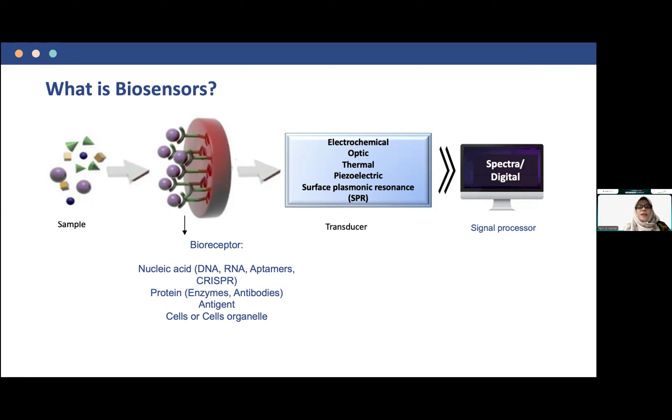Secara umum, prinsip kerja biosensor dapat dibagi menjadi tiga tahapan. Pertama, pengenalan atau recognition. Di sini bioreseptor akan berinteraksi secara spesifik dengan target analit. Misalnya antibodi akan mengenali antigen, seperti DNA akan mengenali pasangannya atau molekul tertentu. Interaksi ini sangat spesifik sehingga menjadi dasar utama dari akurasi biosensor.

Tahap kedua adalah transduksi sinyal. Interaksi biologis tadi tidak bisa kita lihat atau kita ukur secara langsung, sehingga perlu dikonversi menjadi sinyal fisik atau kimia yang terukur yang bisa dibaca. Inilah peran transducer. Dan tahap ketiga adalah pemrosesan atau pembacaan sinyal.

Sinyal yang dihasilkan kemudian diproses dan ditampilkan dalam bentuk yang mudah dipahami, misalnya angka atau spektrum atau gerakan jarum. Kalau dilihat dari sisi yang lebih mendalam, terutama untuk biosensor elektrokimia, proses ini lebih melibatkan fenomena di permukaan elektrode. Nanti mungkin akan dibahas.

Biosensor ini diklasifikasikan menjadi beberapa, di antaranya berdasarkan bioreseptor. Bioreseptor itu merupakan otaknya dari biosensor karena bagian inilah yang menentukan selektivitas, apakah sensor mampu mengenali target secara spesifik atau tidak.

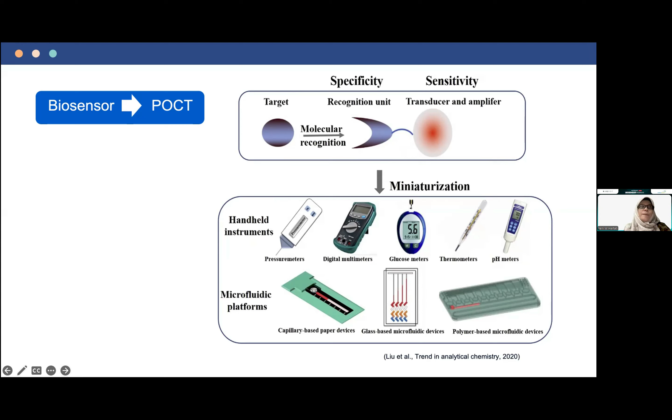Jadi miniaturisasi ini merupakan cara untuk menyampaikan teknologi dari lab ke lapangan tadi. Nah, bagaimana biosensor berkembang menjadi POCT ini? Pertanyaan berikutnya adalah seperti apa perangkat POCT yang ideal? Untuk menjawab ini, WHO memperkenalkan konsep yang sangat terkenal yaitu kriteria ASSURED.

Jadi A-nya affordable, artinya perangkat harus terjangkau sehingga dapat digunakan secara luas, termasuk di negara berkembang. Kemudian S-nya sensitif, harus mampu mendeteksi target dalam konsentrasi yang rendah. Kemudian S yang kedua spesifik, harus selektif, hanya merespon target yang diinginkan. Namanya sensor ya harus menuju target itu, dalam matriks yang kompleks.

U-nya user friendly, mudah digunakan bahkan oleh non ahli atau non tenaga medis. Kemudian R-nya rapid and robust. Hasilnya harus cepat dan sistem harus stabil dalam berbagai kondisi lingkungan. Kemudian equipment free, sebisa mungkin tidak bergantung pada alat tambahan yang kompleks. Jadi dibuat mini dan portable.

Kemudian D-nya deliverable to end users, artinya mudah didistribusikan dan benar-benar sampai ke pengguna yang membutuhkan. Jadi di daerah terpencil, di puskesmas, bisa terjangkau, bisa digunakan, tidak harus ke kota misalnya untuk mengecek atau dalam hal ini misalnya untuk diagnosis awal, diagnosis dini. Jadi diagnosis yang diharapkan itu tidak hanya akurat tetapi juga accessible. Dan menariknya biosensor itu, terutama yang terintegrasi POCT ini, dirancang untuk memenuhi hampir semua kriteria ASSURED ini.

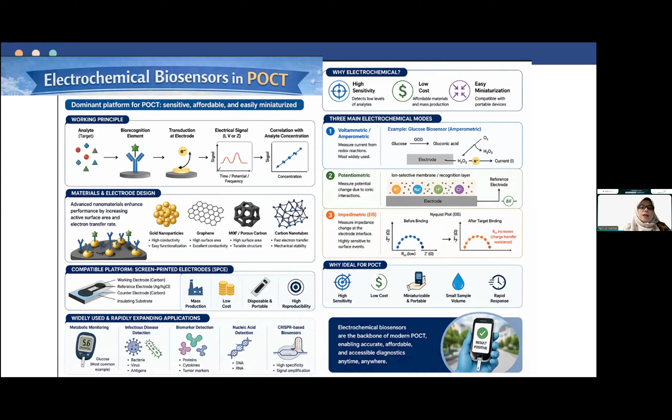Nah, di sisi materialnya, untuk pengembangan elektrokimia biosensor ini sangat mempengaruhi bagaimana kinerja biosensor itu. Jadi permukaan elektrode biasanya dimodifikasi dengan nanomaterial yang umum, misalnya emas nanopartikel, grafen atau turunan karbon, atau MOF, atau MIP. Permukaannya menjadi lebih aktif dan mempercepat transfer elektron. Metode modifikasinya bermacam-macam, ada teknik elektrodeposisi, ada teknik dropcast, ada teknik spinning, dan lain-lain.

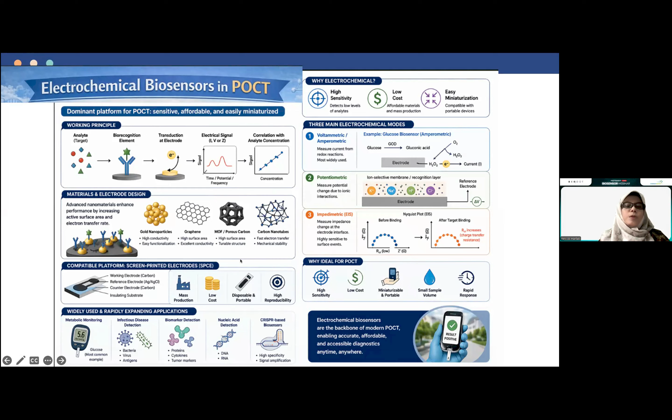Kemudian platform ini sangat kompatibel dengan teknologi SPE, screen print electrode, yang memungkinkan produksi massal dengan biaya yang rendah. Jadi inilah yang membuat biosensor elektrokimia sangat cocok untuk POCT karena dibuat kecil, murah, tetapi tetap sensitif. Jadi banyak contoh yang sudah disebutkan juga seperti glukosensor, kemudian sensor berbasis CRISPR juga sudah banyak dikembangkan.

Nah, sensor elektrokimia ini pada perangkat POCT bisa digunakan untuk menganalisis berbagai biofluid, sampel biologis yang mencerminkan kondisi fisiologis tubuh. Misalnya dari sampel darah, yang merupakan biofluida utama karena kaya informasi, namun pengambilannya bersifat invasif, jadi harus diambil darah. Sehingga mendorong penggunaan alternatif non-invasif seperti cairan interstisial, keringat, saliva, dan air mata juga menjadi salah satu alternatif. Biofluida non-invasif ini memungkinkan pemantauan kesehatan secara lebih nyaman dan real time, meskipun beberapa seperti air mata masih menghadapi tantangan teknologi, agak susah mengambil sampelnya.

Jadi secara umum teknologi ini fleksibel dan dapat disesuaikan untuk berbagai aplikasi diagnostik dengan memanfaatkan beragam jenis bioreseptor seperti enzim, antibodi, dan aptamer. Jadi contoh yang paling sukses yang banyak disebutkan dari POCT ini adalah sensor glukosa atau glukosa biosensor. Ini telah merevolusi manajemen diabetes di seluruh dunia.

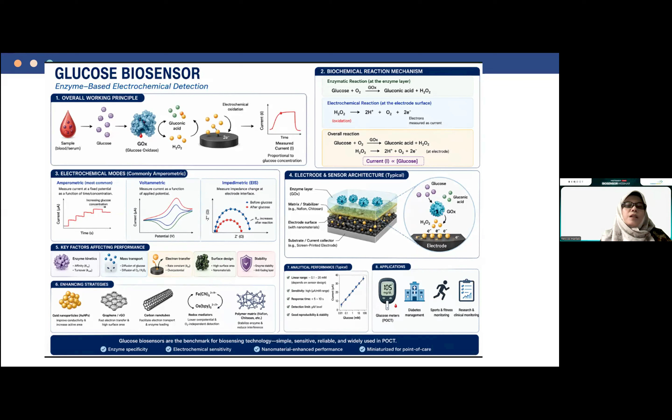Jadi itu contoh yang paling banyak dari electrochemical biosensor untuk POCT ya.

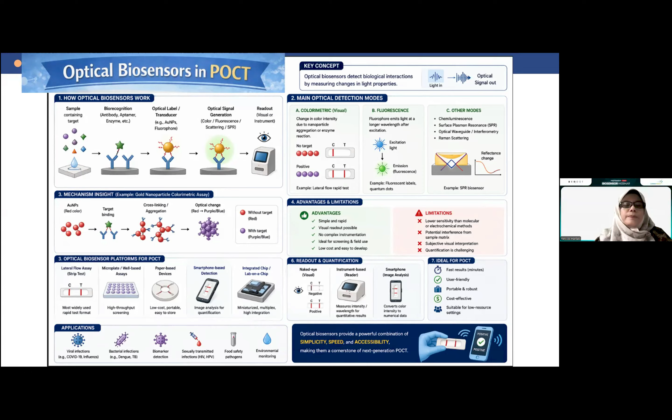Kalau berbasis antigen, pendekatan pertama ini tadi yang banyak digunakan di rapid test, mekanismenya sederhana. Terbentuk kompleks antigen antibody, kompleks ini menghasilkan warna.

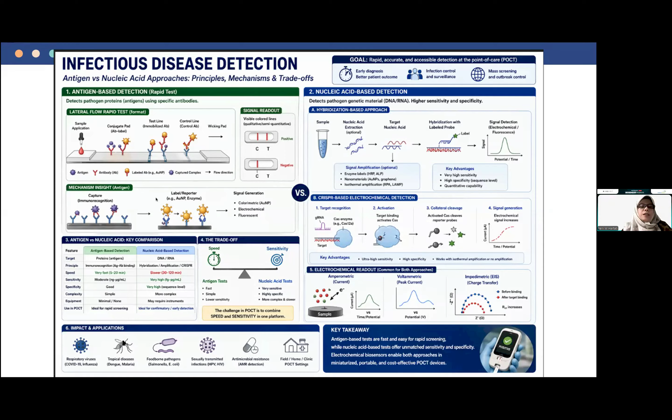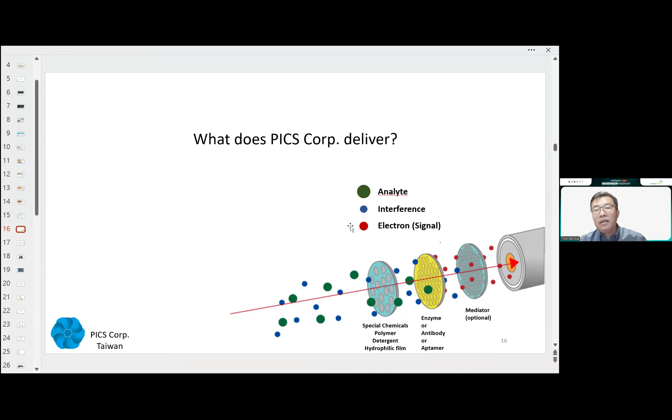We start from the electrons, because if the electrode is not stable enough, it's very hard to get a low background and make the signal-to-noise ratio better. Most of the time, our customers emphasize what the problem is, and they have an idea to solve it, and they can define why it's important, and we help them test it and make a prototype for them.

Most of our customers are so smart, they have a lot of ideas to solve this problem. We play a role to help them make everything simple and not too complex. Most of the time you can think about optical, electrochemical, thermal, and magnet as the signal to get numbers and measure it.

Most importantly, for academic research, you confirm what is the detection limit or how to prove the concept. But unfortunately, you need to think about repeatability and reproducibility. Most of the time we are stuck on reproducibility because the material has a lot of variation, or even the production process is too complex, too much. That's why the stability is not good enough, especially if you modify too many layers on the electrodes. The yield rate will get lower and lower because the performance will not be good.

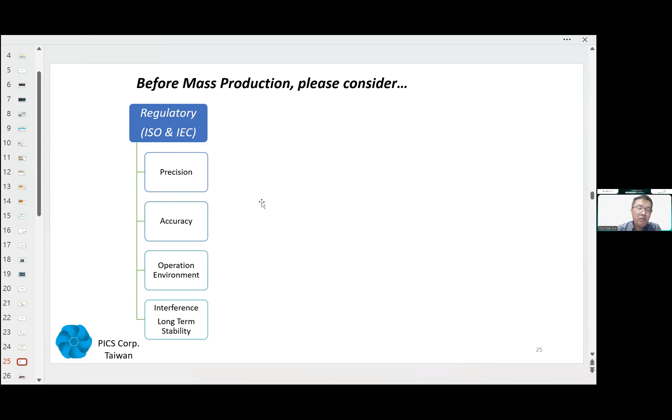This page is very, very important. Before mass production, please consider regulatory requirements like ISO or IEC, precision, accuracy, operation environment, interference, and long-term stability. For example, long-term stability - we think about open vial long-term stability and storage long-term stability. It's about quality. For example, a diabetes patient's glucose meter needs to follow ISO 13485 and ISO 15197. That's a very crucial request from regulatory.

And most importantly, you need to finalize the market size. Market size means what is the user prevalence and what is the user frequency? You need to calculate that, and determine if it belongs to emergency or chronic need. It's very important also to identify your major competitor - who is the top 5 over the world or territory, who is the winner? You need to identify that when you want to take this topic to make the product in the end.

And the pricing structure is very important. Most of the time, honestly speaking, production fee will be less than 30%, because another cost is spent on sales and marketing, like 30%. R&D or administration occupies around 20%. So finally, even after you minus the tax, you just only leave 20% as your profit in the optimized scenario. That's the real world we operate in.

So when we open this box to tell the researcher - if you just only think about the material price and the end user price, it's not fair. You need to think about the sales and marketing fee or even daily operation fee, not only production. That is the real one, and it's easier to convince the investor reasonably.

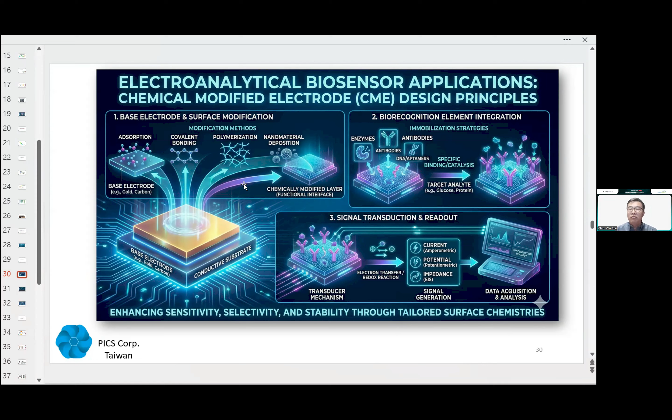So it's much easier to understand, and much easier to carry on. Because normally, if you think about an analog signal, everyone judges it from a different concept. Even with lateral flow tests, one line or two lines, and how deep the color is to determine the concentration - no one can judge that precisely. But electrochemistry or electroanalysis can do that because it's a digital signal.

So who is the biggest marketing or very successful example? Glucose meter. Actually, there are two kinds of glucose meters - one is a portable traditional glucose meter with a strip, and the second is the continuously monitoring glucose system, we call it CGM. Or you can change the enzyme for lactate, or even lipids like cholesterol, triglyceride, and high density or low density lipoprotein. This is a very successful story you all know, and the market size is pretty high - right now 1 in 10 people has diabetes in the world.

So second, what application can we approach? Small molecules like dopamine, catechol, some small molecular weight species you can detect, or ions like heavy metals - lead, cadmium, potassium, sodium - or other ions causing pollution in the environment, or some biomarkers you can detect. Using redox activity, we call it cyclic voltammetry, to see what is the real performance to set the voltage to detect this species. That's why you can get a very fast real-time result with low sample preparation.

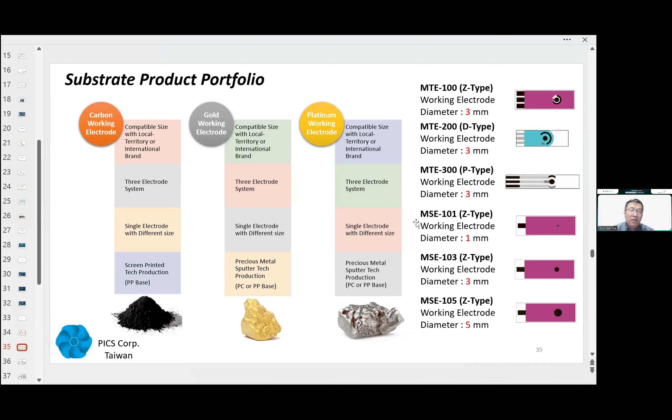Maybe all of you have enough background to see how good the performance is. But I just try to tell you, if you see this graph in the middle, if the peak is more symmetric, it's good. If the peak is too separated, too much, I think the resistance will get so high, so the background will become worse.

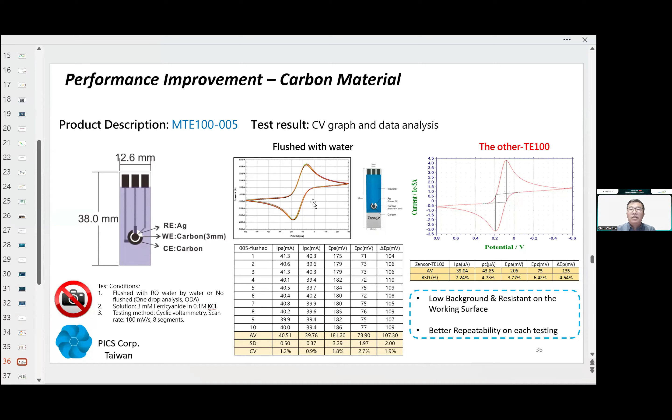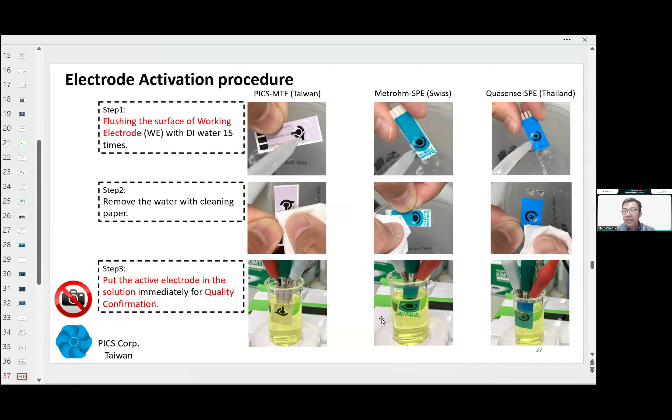So we also have some comparison from ours and from Europe, even Thailand manufacturers. We used the same process to make the comparison and testing by ferricyanide in potassium chloride solution. Actually, right now we can have the better one. More symmetry is easier to get a low background and the RSD will be lower.

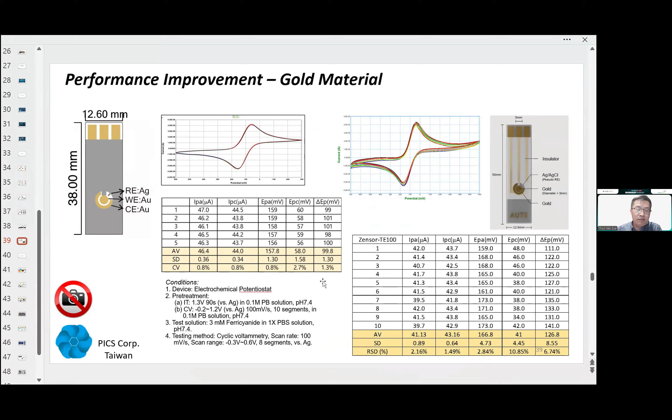So that's why the substrate is very important to all of you if you want to go into the biosensor field. And we also have the gold, same philosophy. Later on, I think I can share the slide because today we have so much information to share with all of you.

We also provide equipment for lab and industry scale. It means reliability is priority one out of a hundred. The printing looks so easy, but actually you need to think of so many things, like your ink, your tooling, your moving parts, what is the equipment, and the drying oven is very important—not the batch type.

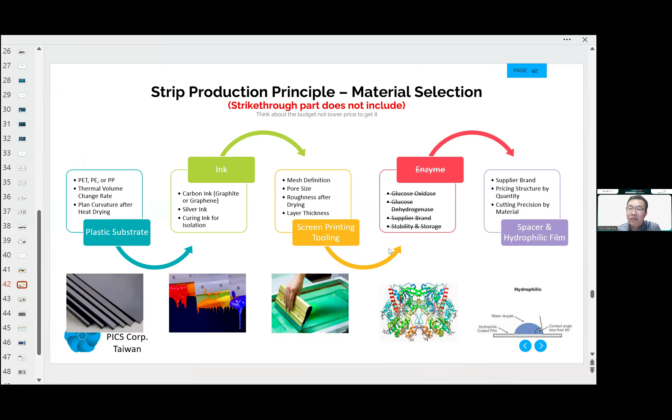And even the material, we need to select what is the plastic substrate, what is the ink, what is the tooling, even the squeegee, even the pore size or roughness after drying. The enzyme, actually right now we did not offer anymore, but if you need, we also open another page to provide this one. And the spacer hydrophilic film also for the modification.

That's our working station design. If you have a chance to visit our factory, you can see all of them—things from the beginning, from the material to the end, like cutting.

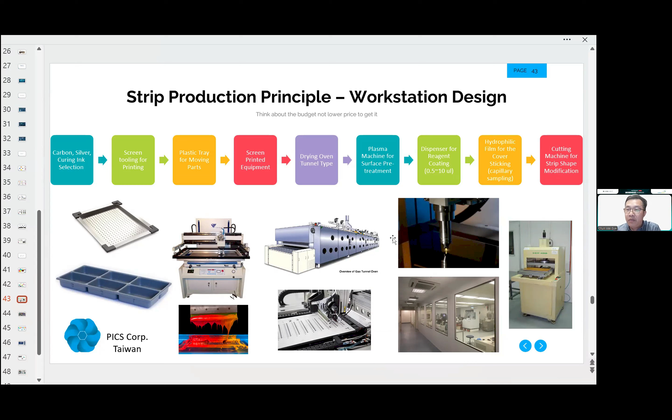So print it, make it dry, use plasma to make a surface pretreatment, use the dispenser to coat the chemical on it, and tapping on the hydrophilic film for capillary sampling, and cutting to make a real one that can be used. So I would like to use this picture to share this.

From left to right side, it means make an ink and print it out, make it dry, pass through the oven, use the plasma to make it hydrophilic, drop something on it, and finally use the cutting machine to make the shape.

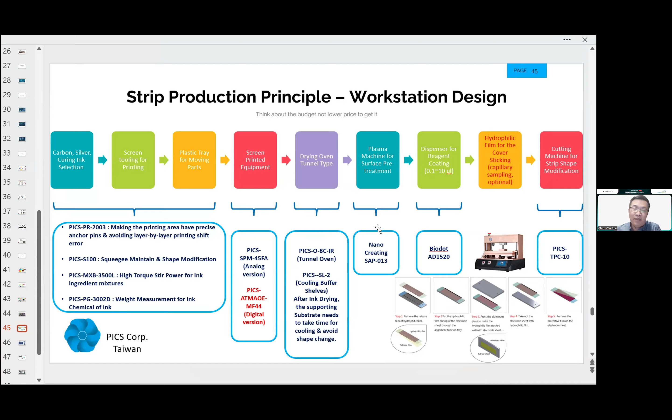That is our equipment we can deliver, and we can help the customer to make the customized biosensor. And the plasma is also very important because it is a key step.

After printing, we have different kinds of plasma to help our customer achieve a certain goal—not only to make a hydrophilic film, but also to make some chemical functional group on the surface. So for different materials, we can share the parameter information with all of you.

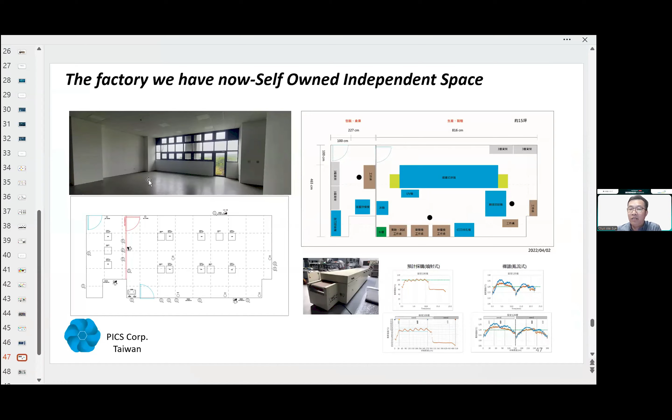Originally, we had a very small space—you can think about that, just only 50 square meters. We then put everything inside, and we also let a lot of visitors come to us to see what's going on. Most of our customers come from Japan and Thailand.

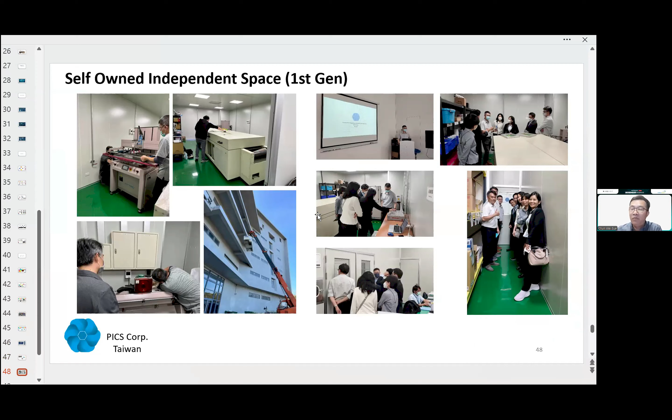And then right now we already upgraded our factory. Now it's the second generation, almost everything automatic.

So I would like to make a summary. I think if you want to have mass production, dynamically, the tolerance window is very important, and the material must be stable. Most importantly, the design must be easier for the manufacturer, because normally we try to solve the problem using all our effort to solve that, but finally, it's very hard to produce it.

And that's why, to show some philosophy or image to the granting agency or investor, think about it—this is good enough and we can move forward to the next step. So that's my summary, and I want to share all this information with you.

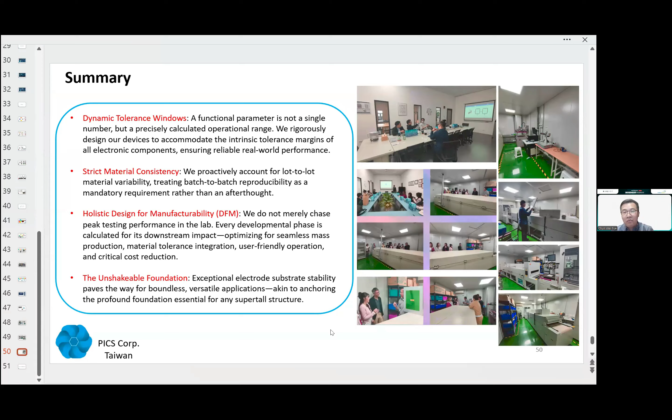Thank you very much, Dr. Warrick. It's a very interesting presentation about how to move from research to mass production. I think for manufacturers there are many things to consider, many things to solve. I hope in Indonesia there will be more manufacturers for biosensor development here. Thank you very much for your time and presentation.

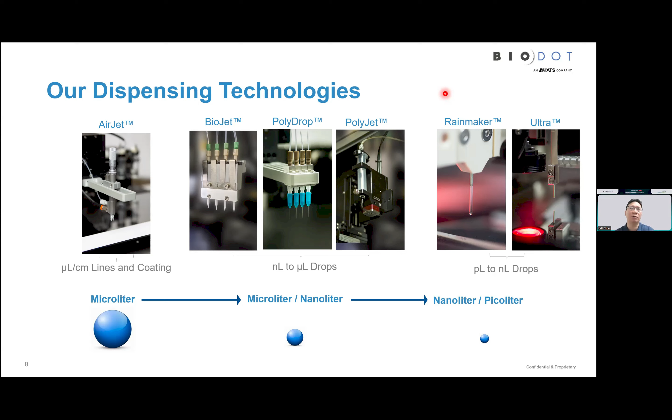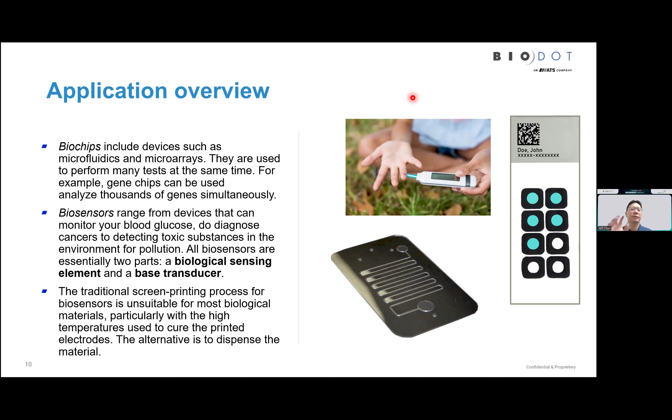Here's kind of an application overview for biosensor and biochip. For biochip: prepare reagent, print biochip, add sample, label, hybridization, then you get a result. For biosensor, similar: prepare reagent, print, dry sensor.

Singlicate, assemble - so what BioDot does here is printing biochip, assembly, and in cytogenetics we can also help with hybridization and wash. But most of the time we focus on these two: print and add sample, because that's how we do precise dispensing on the precise target area.

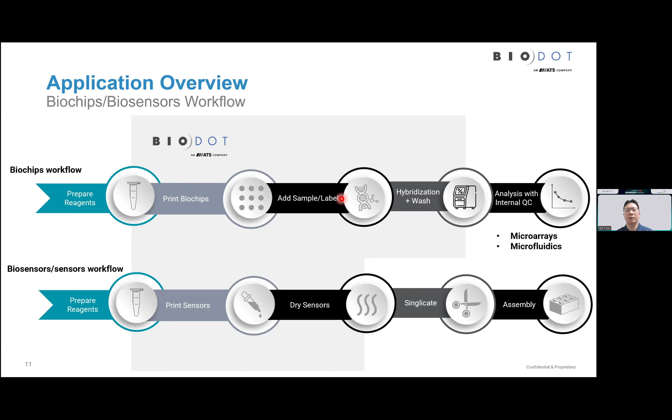So why BioDot? On the market you can see some similar dispensers, but most customers or R&D researchers will face challenges with changing drop volume with low coefficient of variation, called CV. Then you want to adjust chemistry, which often leads to changes in physical properties - most importantly, viscosity. Then adjusting drop spacing, then applying multiple analytes - BioDot can do this, and we've been doing this for a long time.

For example, in this picture, this is biosensor, this is biosensor, this is a multiplex PCR and ELISA, and this is biosensor too. In order to fit different applications, finding the proper tool is important, and of course the key is CV, precision.

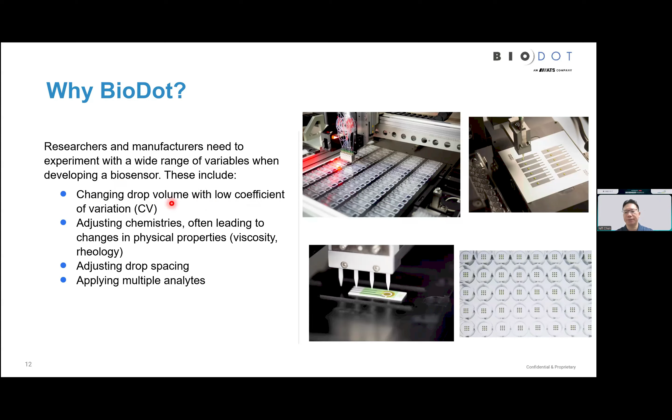What's the precision and mean? So volume ranges from picoliter to microliter as a single droplet, viscosity 1 to 100 cp. Then less than 5% CV at our lowest volume, 25 picoliter.

For example, in a blood glucose sensor, the dispensing volume for the reagent is normally around 0.5 to 1 microliter. We can basically achieve within 2% CV. What I mean by 2% CV is, let's say you dispense 1 million drops per day with this kind of automation system. Then if you're dispensing a more water-like solution, or a buffer, you can easily achieve below 1% CV.

The motion precision is normally less than 10 micron. But in reality, when you do production, I'd say below 25 micron. 10 micron is the limit of the mechanical design. As for speed, I'll show you—it will be very fast, non-contact on-the-fly dispensing. That's designed for manufacturing, but for R&D you don't need such high speed. You can choose a different mode to do that.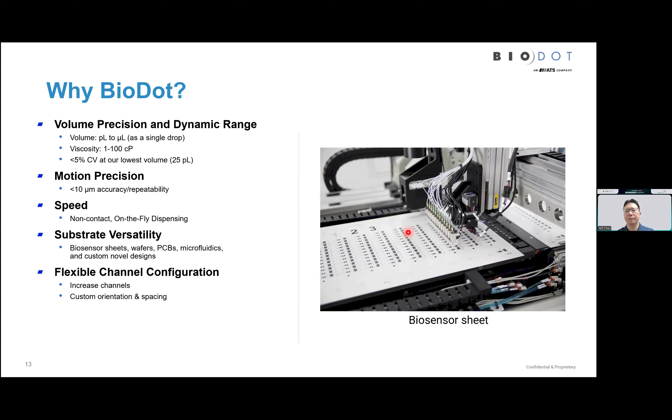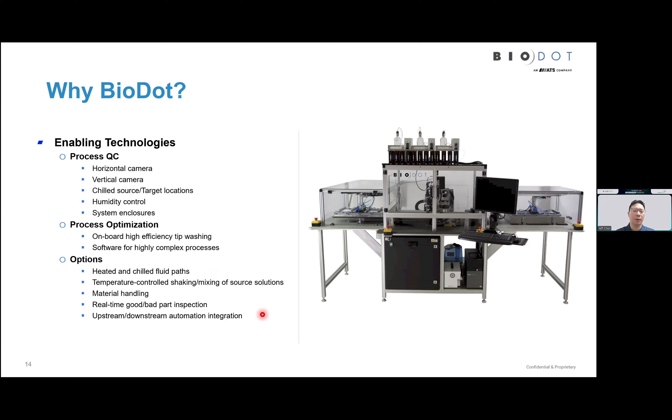Depending on the requirement, we have some other options, such as heated and chilled fluid paths. For some reagents we need to heat it in order for it to flow. For example, sometimes we dispense wax, or for the qPCR cover there's a different material, but when we try to dispense that, we need to heat up the wax or other material, then we can dispense it. Then there's temperature control, shaking mixer of source solution, material handling, real-time good and bad part inspection, and upstream/downstream automation integration. ATS is very strong and experienced in automation, so that's something we can do too.

Okay, so this is an example stacking, just like a process. You can have loading the material, then dispense, then it goes out, then goes through the dry tunnel. That's kind of a setup for the biosensor.

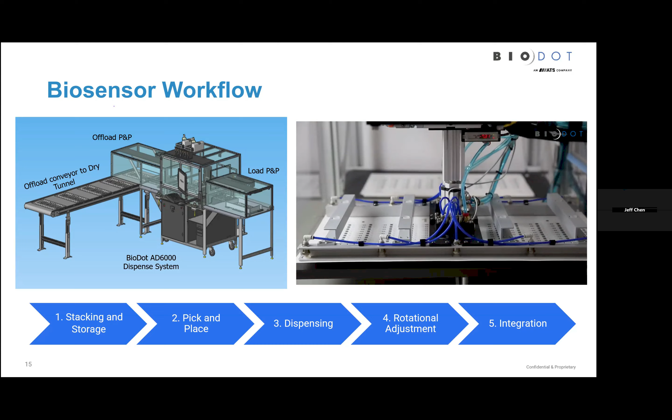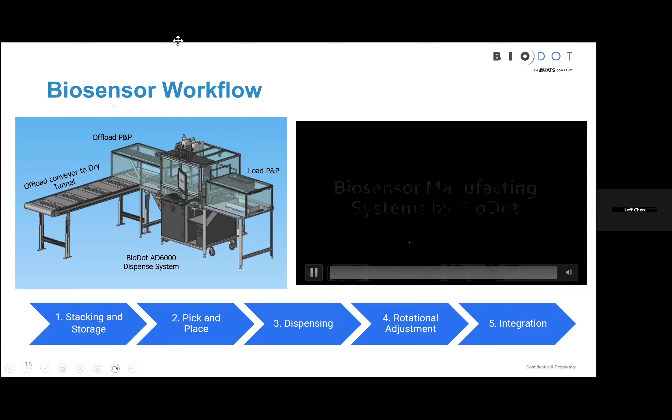For biosensor and biochip projects, especially for the manufacturer, we need to learn what the customer's project is and the goal they want to achieve. We need to understand every single detail of the process so we can help design the system to match their project. But for R&D, I always try to ask our customer what they're trying to achieve. Then with our experience we can really help a lot. That's what we do to help the customer.

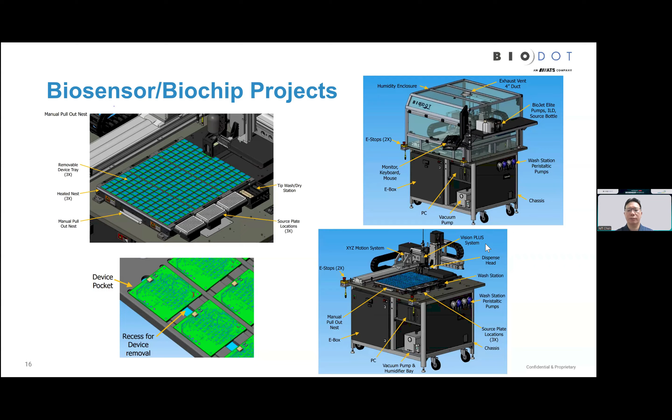This is also an example. Let's say this is a sensor, and this sensor, we need to deposit on this small dot here.

So this part, we try to deposit on this small area. Then we need to design it, and the reagent has some particles inside, so we need to design a shaker and also a chiller to help the reagent stay stirred, so that the material inside will not precipitate.

This is just another example.

Okay, so the dynamic range and precision. BioJet and Rainmaker - BioJet is the most common dispenser type used for biosensors, and Rainmaker is for picoliter dispensing. As you can see, the volume range for BioJet is around 2 nanoliter to 2 microliter per droplet, in step-and-repeat and on-the-fly modes. Precision is normally less than 5% CV, but depending on the formulation, we can easily achieve below 2%, even 1%, depending on what you're doing.

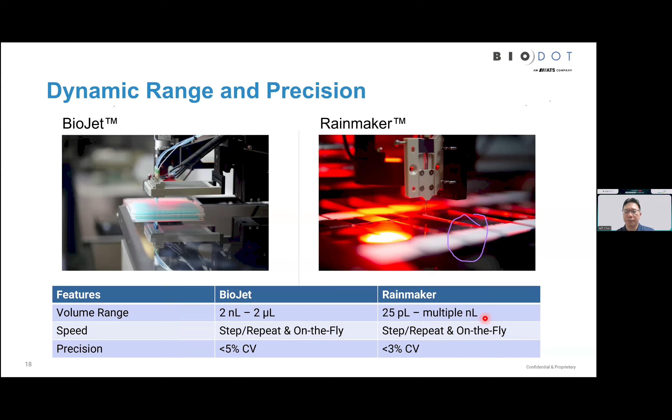For Rainmaker, I think for the past few years the most common use has been for continuous glucose manufacturing - that's what we do a lot. It dispenses from 25 picoliter up to multiple nanoliters, but for a single droplet, I'd say from 25 up to about 200 picoliters. Again, it's step-and-repeat and on-the-fly. I'll show you in the next video. Normally it's less than 3% CV. So here are some videos you can take a look at.

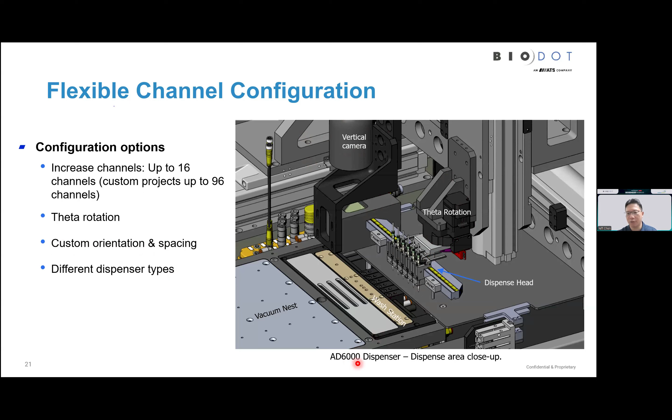The machine you see here we call the AD6000. This is designed for large manufacturing, mass production.

Then QC process for picoliter dispensers. Simply because picoliter is too small, you cannot measure it directly, so you need a camera to capture the droplet and do internal calculations to determine the size being dispensed. For nanoliter or microliter, it's easy — we use an Eppendorf tube to accumulate and collect the droplets, say 100 drops, then weigh them on a balance.

But picoliter is different — it's too difficult to measure by balance, so you need a different approach: high frequency imaging and strobe microscope lighting to capture and measure individual droplets. We look at morphology, volume, and do statistical calculations to check the CV.

Then high magnification vertical camera for device imaging. This is in AD1520 as well — you can take images before and after to check where you dispensed and the location, for droplet position correction and target alignment.

The software can also make this automatic — we call it fiducial finding. For example, if you have a device, you can set a target, then the machine's camera can find that target to dispense. We call it fiducial finding.

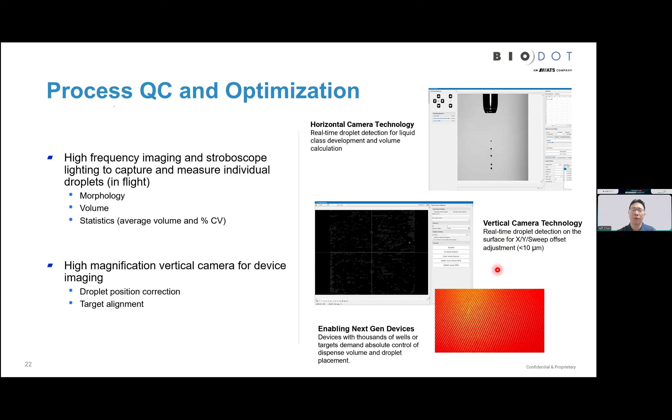We develop on a scalable technology platform, meaning no matter which platform you use, you can use almost the same parameters across this product line. For example, if you use the AD1520 for R&D and succeed, you can transfer those parameters to the AD6000, or even the larger fully automated modular system. It's streamlined to help you go from R&D to manufacturing.

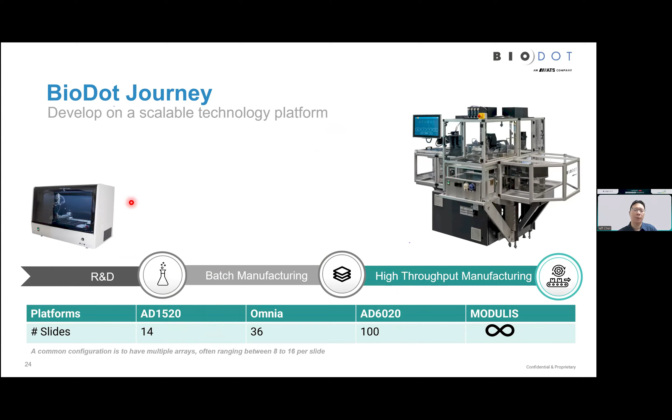Then this is a sheet-based biosensor production system I just introduced before. So inline batch, again, use AD1520 to practice, then migrate to AD6020, even larger. So for this one, you can see this is a kind of magazine. It can upload the material onto a dispenser system automatically.

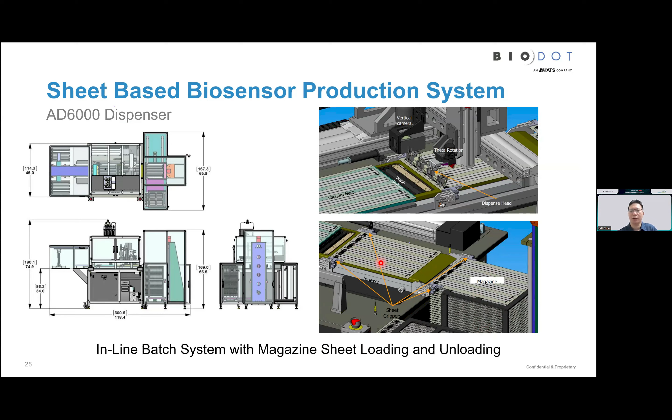And summary: BioDot has the necessary tools to manufacture biochips and biosensors, of course from R&D status. Then our wide dynamic range is used to dispense a wide range of reagents. Improving CV for current assays is the most important. Less than 1% CV and volume above 1 microliter, that's very easy for us.

Reduce volume and cost per assay, that's our goal to help our customers with manufacturing. Increase density of assay, of course that's important too, because it can cost down the manufacturing. Then we have experience manufacturing DNA, protein, polymer, and cell-based biochips.

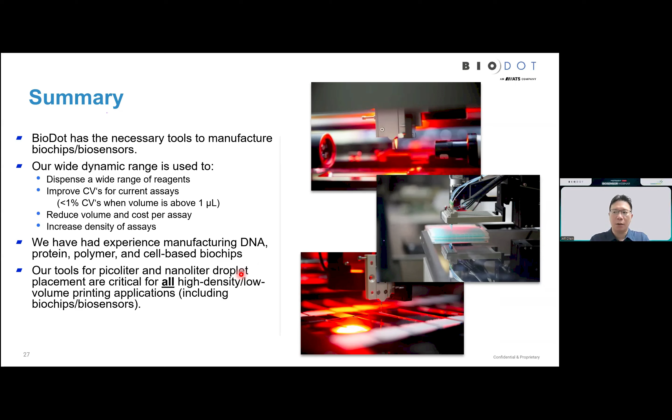Then our tools for picoliter and nanoliter droplet placement are critical for high density, low volume printing applications, including biochips and biosensors. This is also, I forgot to mention, right now it's also quite useful for NGS sample prep, especially when you try to build up the library. We have customers use this for sample prep, Takara, and some other third-party laboratories in the US.

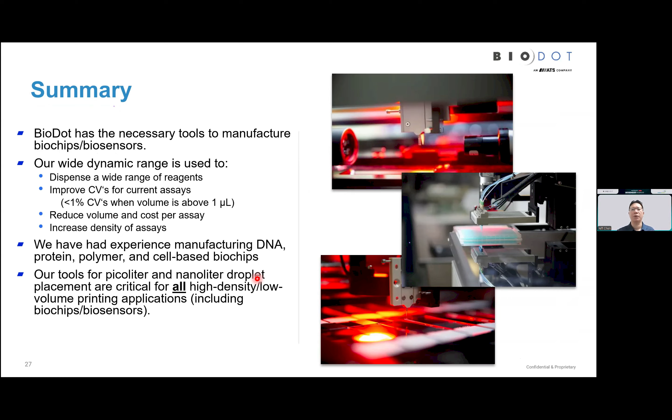So if you have an NGS application and you need our help, you can approach me too. I can share some experience. Okay, thank you, that's my presentation today.